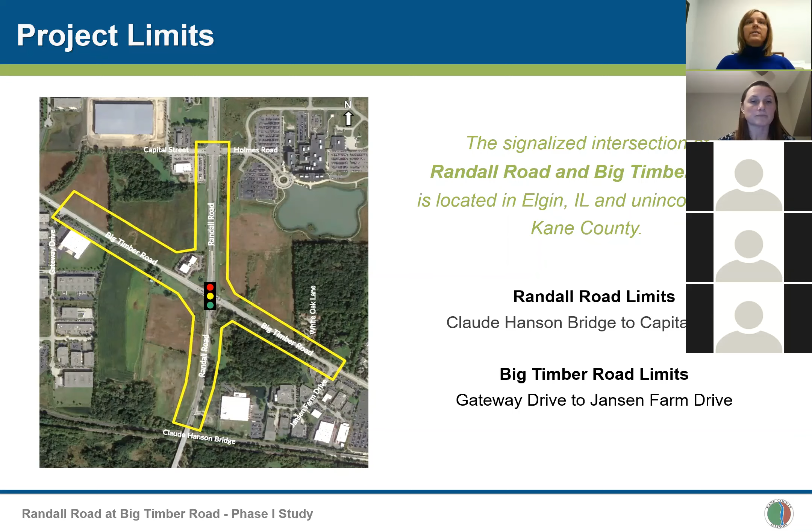There are 4 parts to the purpose and need for this project. We will walk through each of them individually. The first part is intersection capacity. Most people who drive in this area experience firsthand the length of time it can take to get through this intersection, especially during rush hour.

Often, it takes more than one green light, sometimes multiple lights if an ambulance needs to get to the hospital. This tells us that the existing intersection is over capacity, with long lines of vehicles and delays. Adding additional through lanes are needed to accommodate existing and future traffic growth along Randall Road. The turn lanes are also not long enough for existing or future traffic and will need to be made longer.

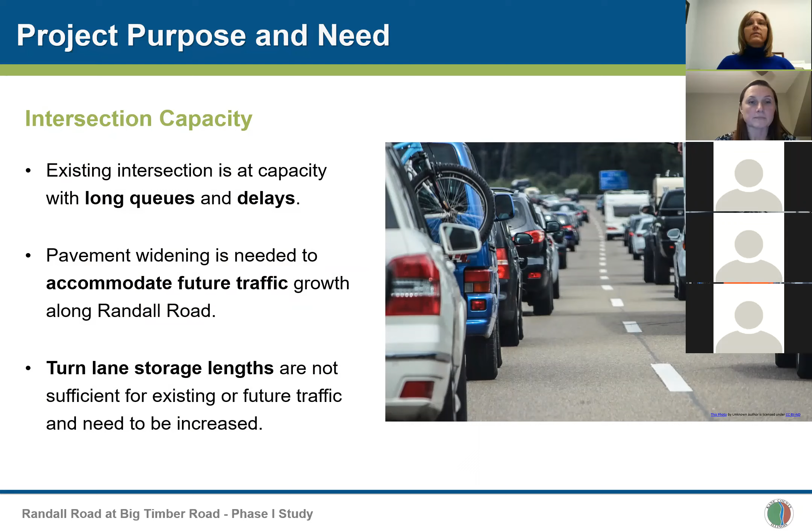The second part of the purpose is intersection geometry. The existing intersection is not at a 90-degree angle or right angle, it's at a 61-degree skew. This means drivers sometimes have a difficult time seeing traffic coming from opposing directions, especially turning right from Big Timber Road to Randall Road.

To watch for a chance to turn right, drivers need to look over their shoulder rather than directly to the left. In addition, trucks turning from Big Timber to Randall Road have to move more slowly and make wider turns to navigate the intersection. This slow movement further limits the number of vehicles that can make those turns during each green light.

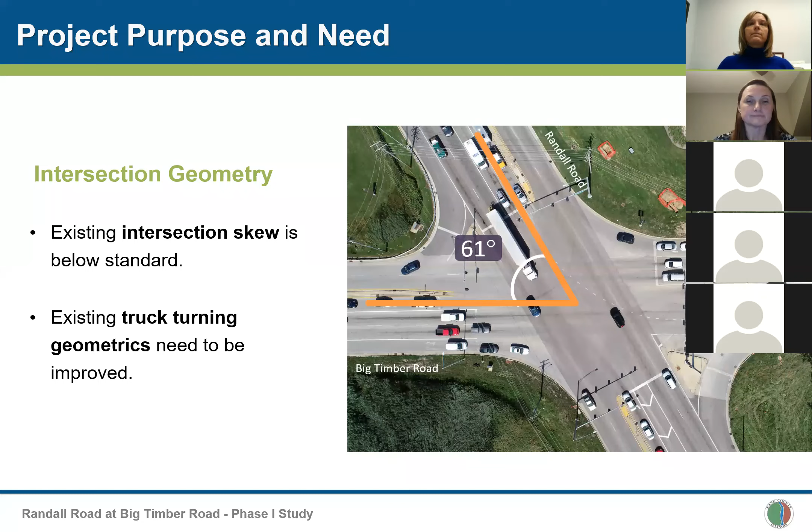The third part is pedestrian accommodations. There currently are sidewalks along the east side of Randall Road near Holmes Road and also along the north side of Big Timber Road east of White Oak Lane, but nothing at the intersection. There are also PACE bus stops on the northeast and southeast corners. This project will provide the connection between the existing sidewalks, as shown with a yellow line on this image.

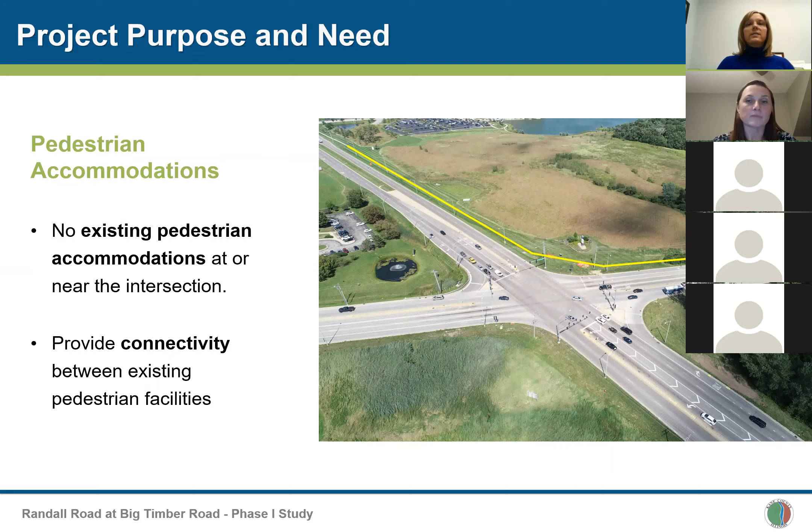The final part of the purpose and need stems from the intersection capacity need. Because it can take so long to get through the intersection, motorists are finding other routes to bypass it. A route commonly used includes Alft Lane and Madeline Lane to avoid the Big Timber intersection. These routes are not designed for nor intended to be used as a main thoroughfare, so part of the purpose of this project is to reduce delays so drivers don't want to find alternative routes.

Another function of the intersection affected by capacity is emergency vehicle access to and from Advocate Sherman Hospital. While emergency vehicles disrupt the movement of vehicles through the intersection, the capacity bottlenecks also make it difficult for these vehicles to get to the hospital quickly. Increasing capacity will allow emergency vehicles to navigate the intersection with less interruption to drivers.

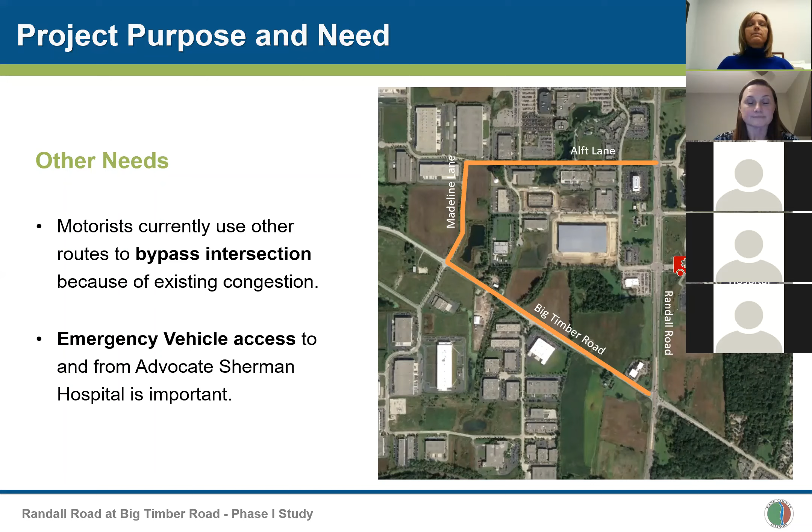Now we understand why the intersection needs improvements. So what goes into determining the best solution? As part of our evaluation, we look at current traffic patterns and volumes. This included counting traffic at the intersection and then studying the traffic patterns to analyze whether or not vehicles were using alternative routes to avoid the intersection.

Roadway projects look for improvements that will function well for many years, not just today. Because of this philosophy, the design has been based on future traffic projections for the year 2050, rather than current volumes. We also analyzed crash data from the last 5 years, which we'll talk about more in detail shortly.

We looked at environmental impacts. What is in the surrounding area? Are there wetlands? Are there threatened or endangered species? Are there any special waste considerations?

We will also take into account community impacts. What are the surrounding land uses? Are there any sensitive properties that could be impacted?

And then we obtain stakeholder and property owner input. We meet with surrounding landowners and discuss the project's needs and their concerns. We also coordinate with the utilities adjacent to the project, as there are overhead power lines as well as other underground utilities that need to be considered in the design.

We've also coordinated with the City of Elgin to incorporate any of their utilities in the area. Then we looked at the existing pedestrian and bicycle accommodations in the area and what the future needs are of the region. Finally, we also looked at the existing drainage patterns to determine where water is going and how it is flowing around the intersection. We want to make sure that we maintain existing drainage patterns and that we're not going to be increasing flows to the surrounding properties.

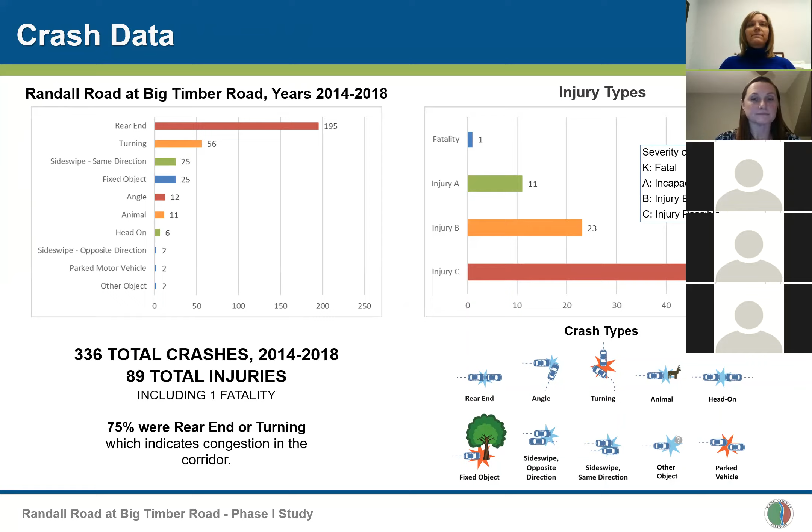This completes our first section of this presentation, and we will open it up for questions about the general basics of the project's purpose and need, and what the data has shown us.

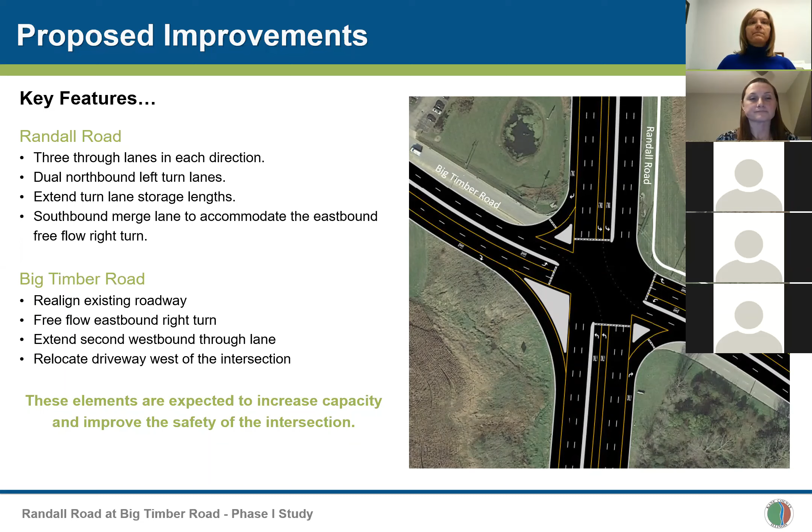Looking more closely at each leg of the intersection, we will start with the north leg of Randall Road. The project limits on this leg extend to meet the current 3-lane in each direction roadway section, just south of Holmes Road. We will be replacing the curb and gutter, adding sidewalk along the east leg of the intersection. Based on the left and right turning needs in 2050, the right turn lane will be extended 60 feet, while the left turn lanes will be extended over 250 feet. This will provide more storage room within the turn lanes so that the vehicles will no longer line up beyond the turn lanes.

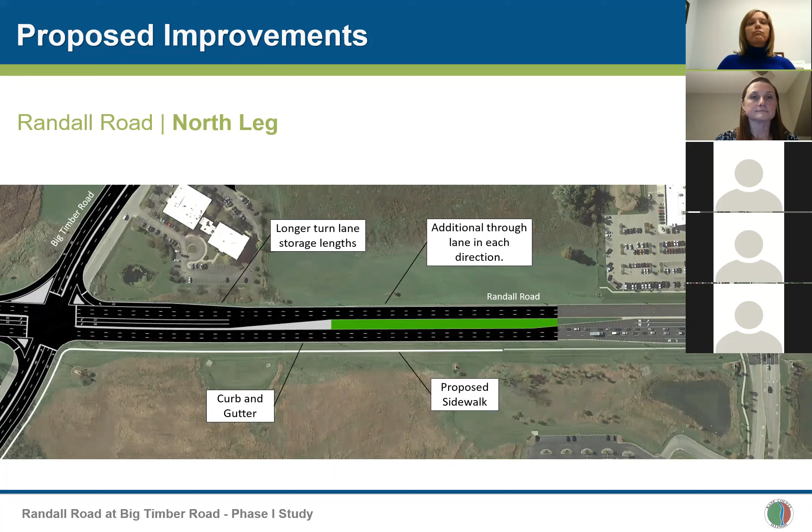On the south leg of Randall Road, the project stops just north of the Claude Hansen Bridge. Like the north leg, an additional through lane will be added in each direction, but will taper back to 2 lanes at the south end of the project. The curb and gutter will also be replaced on this leg of the intersection.

Based on the left and right turning needs in 2050, the right turn lane will be extended 90 feet, while the left turn lanes have been lengthened more than 300 feet. Also added to this leg is a southbound merge lane to accommodate the proposed free flow right turn lane coming from the west leg of Big Timber Road.

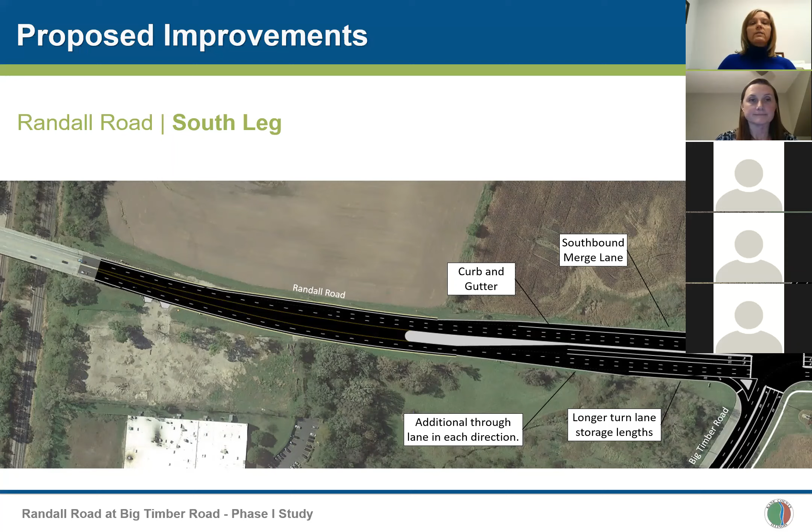Moving to Big Timber Road, we'll start with the west leg. Big Timber Road will be realigned so the angle with Randall Road is not at such a sharp skew. Today, the westbound 2 through lanes taper back to a single lane less than 150 feet west of the intersection. To accommodate the new dual left turn lanes on Randall Road, the 2 westbound through lanes were continued beyond the relocated driveway to allow for an adequate merging distance.

The driveway to the office building on the northwest corner will be relocated further west. Moving it out of the left turn lane on Big Timber Road allowed us to provide left and right turn lanes into the property, improving the safety of that intersection. We will be replacing the curb and gutter on this leg through the relocated driveway, and then transition to a shoulder section.

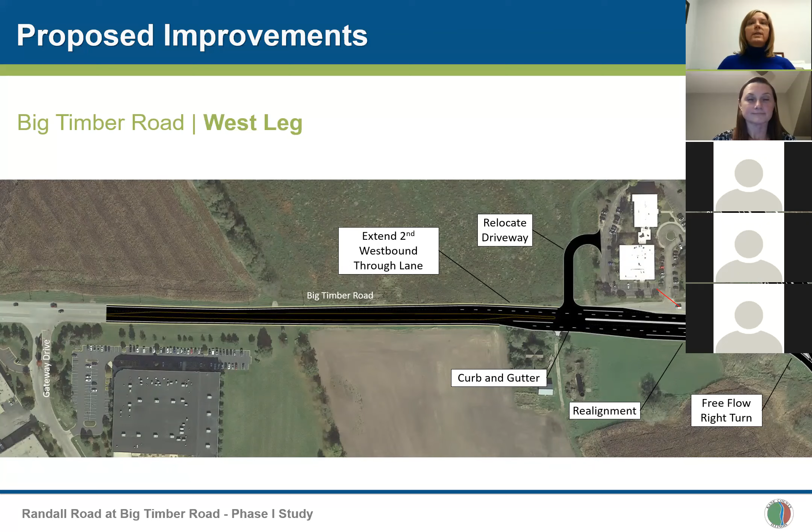This leg of the intersection includes a free flow right turn lane. This movement will function independently from the rest of the intersection and will improve operations of the remaining intersection movements by removing the large number of right turning vehicles from the intersection.

The east leg of Big Timber Road will also be realigned with Randall Road so it is not at such a sharp skew, improving driver sight distance and safety. Curb and gutter will also be replaced on this leg. The turn lane storage lengths have been extended 230 feet for the right turn lane and 145 feet for the left turn lane to provide more room for vehicles within the turn lanes.

Sidewalk is being provided on the north side of Big Timber Road that continues north along Randall Road and will connect to the existing sidewalk at White Oak Lane.

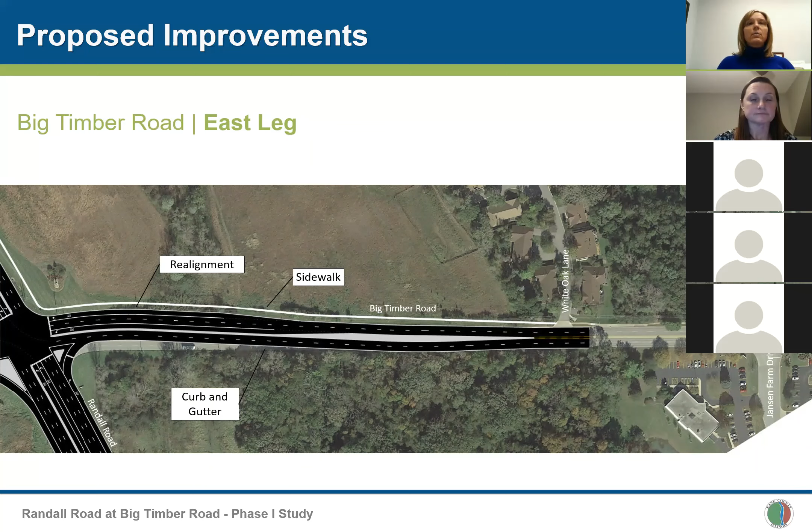The next 4 slides will give you an idea of what the project will look like from a driver's perspective on each leg of the intersection. The first slide shows how it will look to travel northbound on Randall Road, heading towards Big Timber Road. The upper picture is the existing lane configuration on Randall Road, which includes 2 12-foot lanes in each direction, as well as a right turn lane and a single left turn lane with a striped area between the through lane and the left turn lane.

The bottom picture shows the proposed cross section, which now will provide 3 12-foot lanes in each direction, 2 left turn lanes, and a right turn lane. It also shows the southbound merge lane on the left side of the drawing.

This slide illustrates traveling southbound on Randall Road towards Big Timber Road. The upper picture again is the existing conditions, what it's like to travel on Randall Road southbound today. There are 2 12-foot lanes in each direction, dual or 2 left turn lanes, and a right turn lane.

In the proposed condition, the lower drawing, there will be 3 lanes in each direction, a 12-foot right turn lane, dual left turn lanes, and a sidewalk on the east side of the road, or the left side of this drawing.

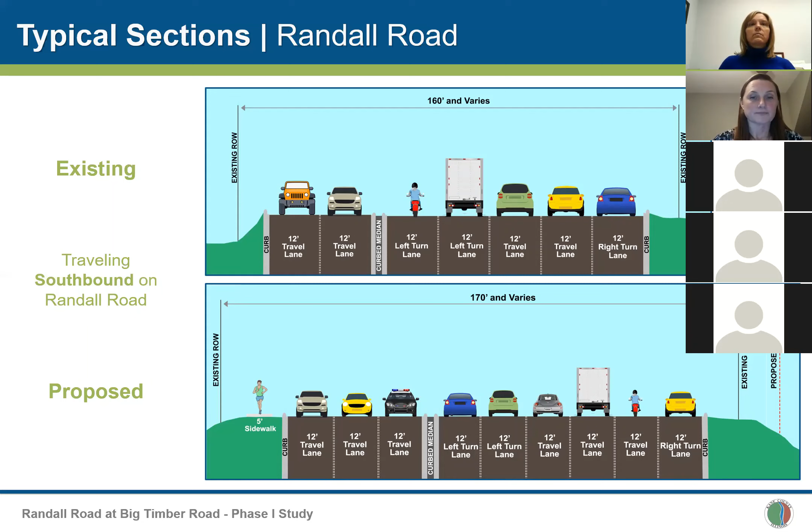Now we're looking at Big Timber Road, traveling eastbound towards Randall Road. The upper drawing shows the current roadway cross-section, which includes 2 12-foot through lanes in each direction, a left turn lane, and a right turn lane.

The bottom picture is what the road will look like in the proposed condition. There will be 2 travel lanes in each direction, a left turn lane, and a free flow right turn lane. The roadway has been shifted slightly to the south, which is to the right in this picture, to accommodate for the realignment of Big Timber Road.

This final slide shows Big Timber Road traveling westbound towards Randall Road. The upper drawing is the current roadway cross-section showing two 12-foot lanes in each direction, a 12-foot left turn lane, and a 12-foot right turn lane.

The bottom picture illustrates the proposed conditions. This shows two 12-foot travel lanes in each direction, a left turn lane, and a right turn lane along with sidewalk on the north side of Big Timber Road. The drawing shows the lanes have been shifted to the north to accommodate for the realignment of Big Timber Road.

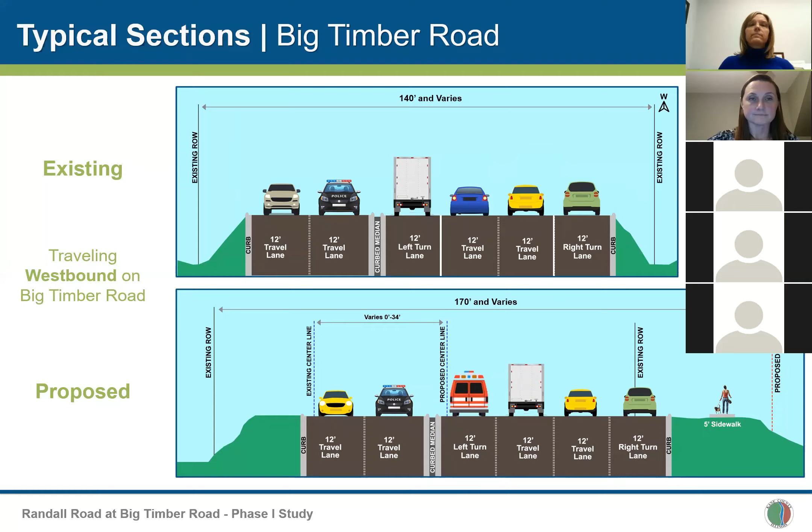This concludes this portion of the presentation. We will now open it up for any questions about the proposed improvements at this intersection.

Thanks, Amy. We still don't have any questions just yet, but we can give it a minute or so. And if no one has any questions, Amy can move on with the presentation.

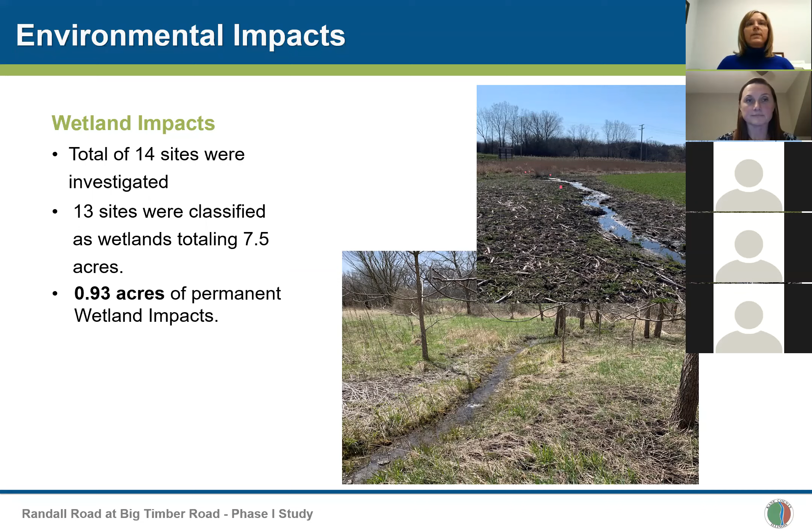The first environmental impact I'll talk about is wetlands. There were a total of 14 sites investigated during the wetland site visit. 13 of these sites were classified as wetlands, with a total area of 7.5 acres. Our design team worked to minimize impacts to these wetlands to the maximum extent possible, resulting in a total of 0.93 acres of permanent wetland impacts. All wetlands impacted will be mitigated through a wetland bank.

Trees 3 inches or greater were identified and assessed based on the condition of the tree. Within the project limits, there were a total of 1,392 trees, with 43 different species identified. Approximately 33 trees will be impacted because of this project. All trees impacted will be replaced on a 1-to-1 basis according to the IDOT tree replacement policy. Detailed landscaping plans will be completed during the next phase of the project, the contract plan preparation.

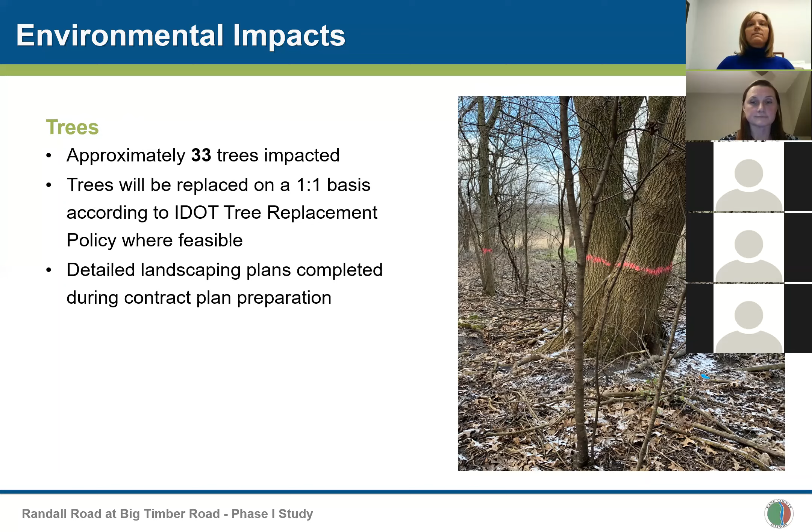A noise analysis was completed per the IDOT noise policy. Highway noise is dependent on traffic volumes, traffic composition, traffic speeds, and the distance and elevation of a receptor from the roadway. We evaluated 4 receptors on this project, representing 4 different common noise environments, which represent a group of similar receptors with similar exposure, including single-family homes, multifamily homes, and hospitals with outdoor spaces within our project limits.

As part of this study, the existing noise levels were recorded and then compared to the projected noise levels in the design year, both if no improvements are made to the roadway and for the proposed improvements. The existing noise levels ranged from 51 decibels at the hospital to 67 decibels on White Oak Lane. The no-improvement noise levels varied from 53 decibels at the hospital to 69 on White Oak Lane. The proposed improvements varied from 52 decibels at the hospital to 69 at White Oak Lane. The study found that the noise levels if no improvements are made will be just as high as in the proposed improvement conditions.

2 receptors are approaching the threshold for abatement: a single-family residence and the townhomes on White Oak Lane. Both locations would need a gap in abatement measures—one for the driveway on the single-family residence and one for the entrance to White Oak Lane. Noise reduction is not realized when there is a gap in the abatement measure, so the abatement becomes ineffective. Due to this, no noise abatement is proposed on this project.

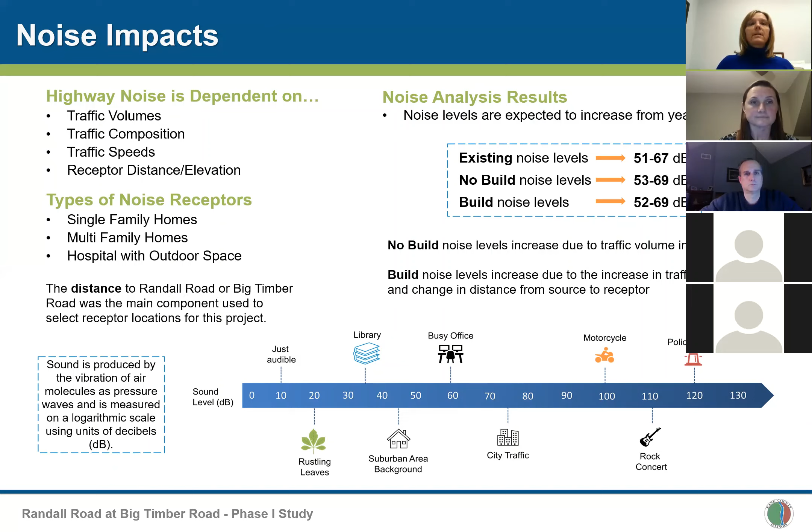And now we will hand it over to Chris to discuss our drainage. Thank you, Amy. Good evening. My name is Chris Alcott, and I'm the drainage engineer for this project.

There are existing storm sewers at all legs of the intersection, typically wherever there's an existing curb and gutter. Rain falling on the pavement will sheet flow to the curb and gutter where it'll flow until entering an inlet or catch basin, which are connected to the storm sewer pipes. These pipes generally convey stormwater flow southward and discharge into swales or ditches. The flow continues southward and eastward, passing through pipe culverts and ultimately outletting from the project area.

A culvert is simply a pipe beneath the roadway which allows stormwater to flow from one side of the road to the other. There are 3 larger culverts in the project area: a 24-inch culvert along the east leg of Big Timber, a 30-inch culvert along the west leg, and a 36-inch culvert along the south leg of Randall Road. There's also an existing detention basin north of the intersection on the east side of Randall Road. Detention basins temporarily store water to lower the runoff rate. There are also private basins next to Randall Road that were developed for the adjacent properties. This area drains to Tyler Creek.

So the runoff from the project area is going to flow southeasterly from the intersection. It flows past Jansen Farm Drive, past the railroad tracks, until it meets Tyler Creek. We can go to the next slide, please.

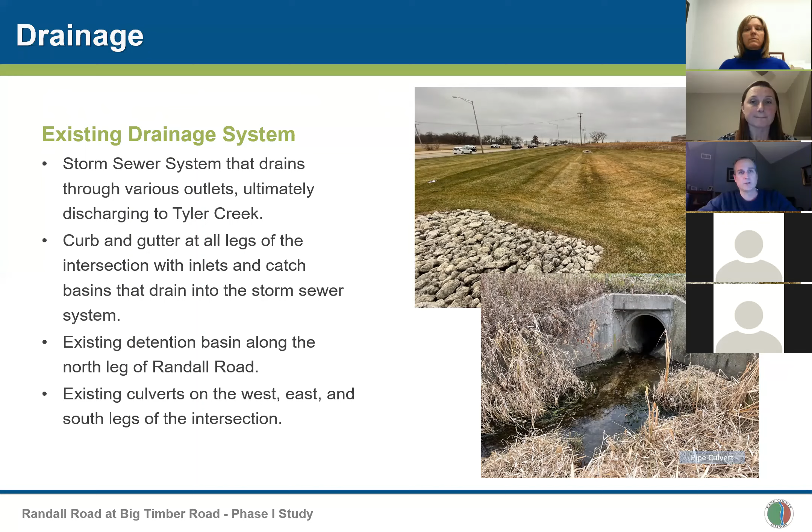The project is designed to be in accordance with the Kane County Stormwater Management Ordinance. The stormwater management system is designed to match existing drainage patterns, improve water quality, and control runoff to protect areas downstream.

While discussing the proposed drainage systems, you will hear references to BMPs. A BMP is a best management practice, a device or action that improves water quality in a variety of ways. These can be structural, vegetative, or managerial type practices.

Also worth noting, in 2019 the standard used to determine rainfall in Illinois changed and is now called Bulletin 75. The result is that designs need to accommodate higher flow rates than before. The improvements at this intersection are designed to manage these higher flows.

The proposed roadway improvements will increase the overall impervious area. A stormwater management system is provided to safely convey stormwater from the intersection, reduce the runoff rate, reduce the volume of runoff, and improve water quality.

To control the runoff rate, stormwater detention will be provided. This will be in small detention basins, detention in roadside ditches, or detention in oversized storm sewer pipes.

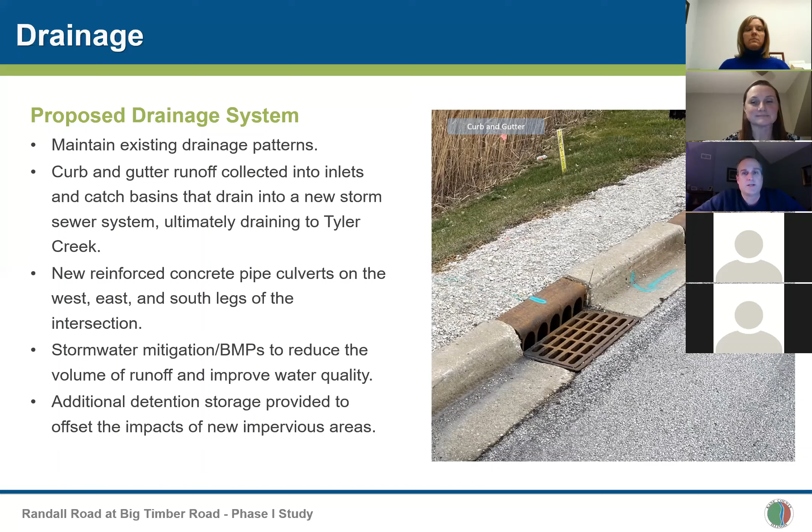Concrete pipe culverts will be provided to replace the existing culverts. The culvert sizes will likely increase. And if we can go to the next slide.

A variety of best management practices, both temporary and permanent, will be used on this project. Many of the temporary BMPs are related to soil erosion and sediment control during actual construction of the intersection.

The permanent BMPs include volume controls and water quality improvements. The aim is to capture runoff and keep it on site, slowly allowing it to infiltrate into the soils, evaporate, or be used by plants. This reduces the overall volume of runoff experienced downstream and improves the water quality.

So now at this point, Amy will discuss land acquisition, and then we'll have another opportunity for questions.

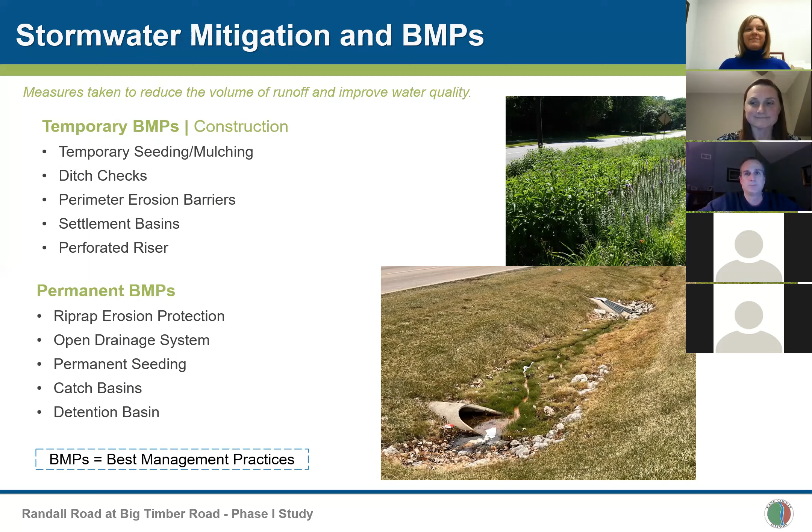There are several types of land acquisition that might occur on this project. The first is called a fee simple acquisition, meaning Kane County would acquire the portion of the property in full that they purchase. The original owner no longer has any rights to the land that is bought. This is generally done for roadway widening and drainage improvements.

The second is a permanent easement, meaning the county would be able to access the property during construction as well as any time in the future, but ownership of that property is retained by the property owner. This allows the county access to the property for construction and to maintain any of their facilities within that easement.

The third type of land acquisition is a temporary easement. In this case, the owner retains ownership of the property, and the county would be allowed to temporarily use that property for a specified term or to complete construction of the project. These are often used for driveway replacements and roadside grading for ditches.

This project includes 1.7 acres of fee simple acquisition and 0.66 acres of permanent easements. There are no proposed temporary easements needed for this project.

The land acquisition process starts with determining ownership of the property, preparing a plat of survey and a legal description, preparing an independent appraisal and having a review appraisal completed, and then finally negotiating with the property owner. During the preliminary engineering stage, the plat of survey and legal description can be completed. The remainder of the land acquisition process happens during the plan preparation phase.